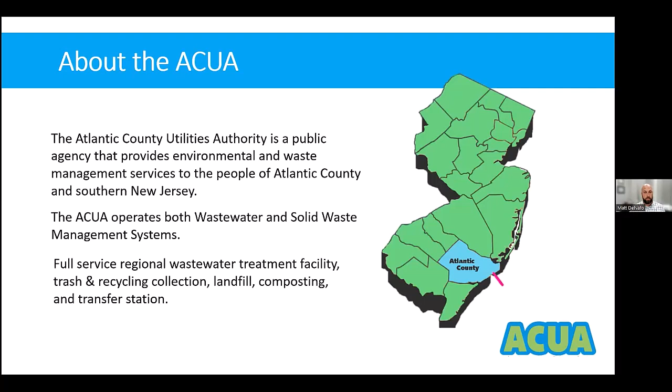A little about the ACUA: the Atlantic County Utilities Authority is a government entity in Atlantic County, New Jersey. We operate both wastewater and solid waste management systems, with a full regional collection system and full solid waste site that we'll go through in detail. Atlantic County has a population of 275,000, a little over 500 square miles in area.

In addition to servicing Atlantic County, we also have a satellite operation in Cumberland County at the Cumberland County Improvement Authority. I'll talk a little about some of the shared services we do, where we don't just service Atlantic County, but branch out into other counties and work through shared services that way.

Some of these shared services may be on a government to government level—most of them are—but sometimes they're just within the county. We have everything from a full certified lab, street sweeping services, storm drain cleaning—we're actually doing stormwater cleaning in Longport, a town within Atlantic County. We have a fueling station that private entities come to. The jitney, if you've ever been to Atlantic City and taken one, they're green, run by compressed natural gas, and they fuel up at our station. They also have their own station, but we try to really expand on shared services because that's the most efficient way to do things.

Having an individual organization, county, or town do every little thing can be difficult and costly, so shared services are a big thing that we promote. Whether it's a school district, a not-for-profit, commercial entities, or another sister agency in Atlantic County, we try to work reciprocally and be efficient in that manner.

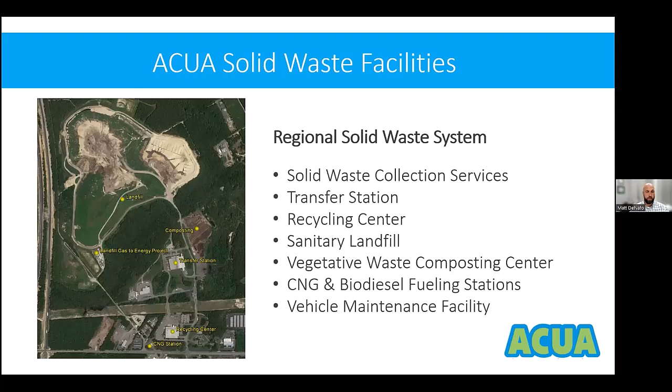The amount of waste - we service recycling, municipal solid waste (household garbage), construction and demolition waste, and vegetative waste here. So everything comes through our facility and is handled in different ways. A little over 300,000 tons a year in municipal and C&D waste, bulky waste, and a little over 100,000 tons a year in recycling material, and that's just for Atlantic County. There's a breakdown of what that material consists of.

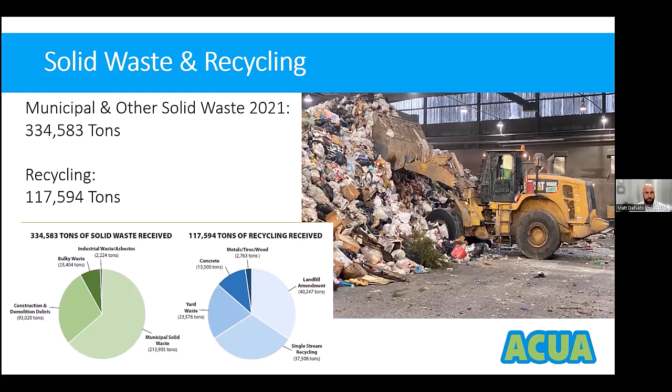Solid waste collections - one thing that's kind of unique for us as a county agency is that we do our own collection services. You won't find that a lot in other towns. You'll find townships that do it, but not a county agency. So we compete with the private sector in collections, whether it's trash, recyclables, or even vegetative waste, your leaves and grass clippings. We provide services to 24 municipalities, not just in Atlantic County, but also in Cumberland County.

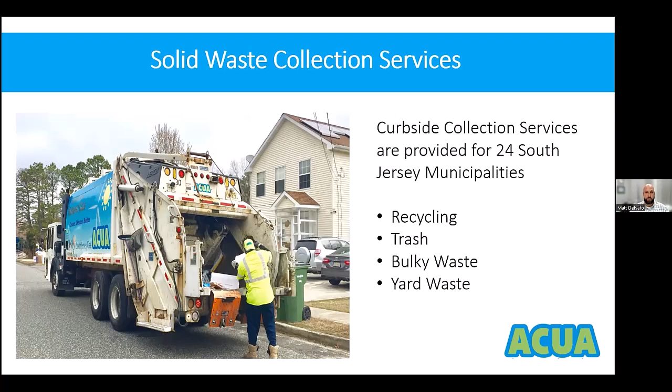This is typically a cost savings to townships. Maintaining trucks, keeping a fleet, and staffing is a big challenge, especially in this day and age, and the private sector isn't always the cheapest. So whether we are providing a second bid for the private sector to compete against, keeping people honest so it's not just one bid, or providing the service at a discounted rate that's cheaper than what they may get a bid for somewhere else - it always comes down to saving ratepayers or taxpayers money. Being a county agency doing collection services for towns is a little bit unique to us.

Recycling services - we have a recycling facility here, about 50,000 square feet. In the early 90s, our recycling center was state of the art. By the time I got here in the early 2000s, mid 2000s, that equipment had become completely obsolete. There was even a banner that said 'state of the art recycling center,' and this equipment had just become completely obsolete - it was only worth what it was in scrap.

So in about 2008, we brought in another company. They retrofitted the entire building with $8 million worth of new high-tech single stream recycling processing equipment. Within the 10 years that passed, that equipment started to become obsolete again. About a year or so ago, when recycling markets dropped out, our contract was up with that service provider, and we're operating our processing facility as more of a transfer station now, sending it to Tinton Falls, to a recycler called Mazza Recycling. They have a brand new facility with a lot of new technology - artificial intelligence and optical sorting that makes the process a lot more efficient.

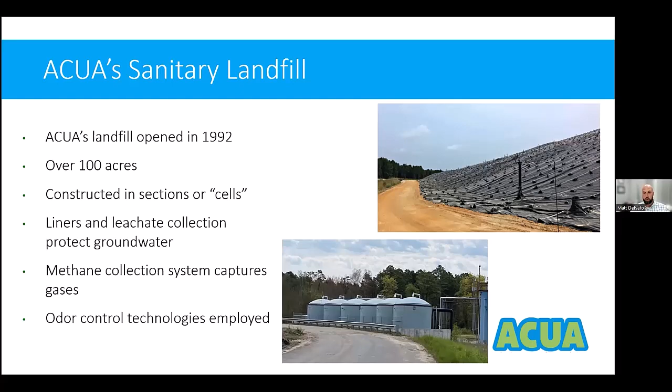One of the projects we work on to extend the life of the landfill - we build in small 10-acre cells at a time - is once we've expended all of that flat area, we look at what are called MSE walls, mechanically stabilized earthen walls. You see them a lot on turnpikes and expressways where you have an overpass, as a way to create a shear wall. If you imagine a landfill as a big mound with a slope coming down on the outside, and you build a wall on the exterior, you create this cheese-wedge of airspace you can capitalize on, which amounts to quite a bit of volume without taking up a lot of space.

We're really constrained by our wetlands boundaries on either side of our landfill, so going wider isn't an option for us on a 365-acre site. So we're building these earthen walls around the exterior, taking advantage of what I always call that cheese wedge, which extends several years of landfill space in our process.

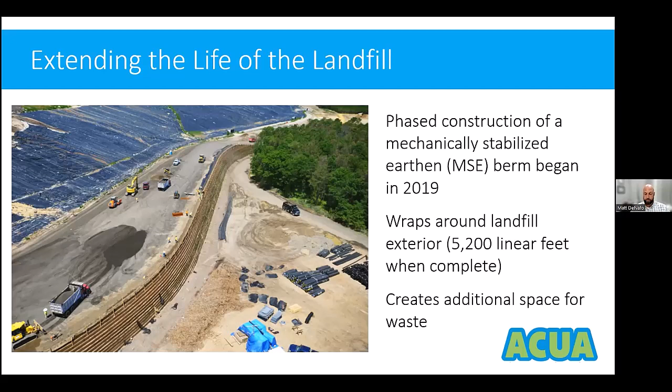The next facility is our composting facility, a 10-acre site. We have our leaves, grass clippings, and clean wood come here. At Christmas time, we have piles that turn a little glittery because everyone's getting rid of their Christmas trees, and they leave tinsel on, or something else on there.

But it's really a great process. It's diverting material from our landfill, and it's a 6-month process. All the material coming in is being sorted typically by grass and leaves. We try to keep the grass a little bit separated from the other material, like mixed branches and brush, because that's our nitrogen source. And then we have leaves, which are your carbon source. The staff there is kind of balancing that a little bit.

After about 6 months, we're able to screen that into a really fine compost material. That process again starts in about 2 or 3 weeks, and we'll start the batch that'll be ready for the spring. So there's already talk that if equipment is down, we're not going to have enough material for the spring, because we sell out by May.

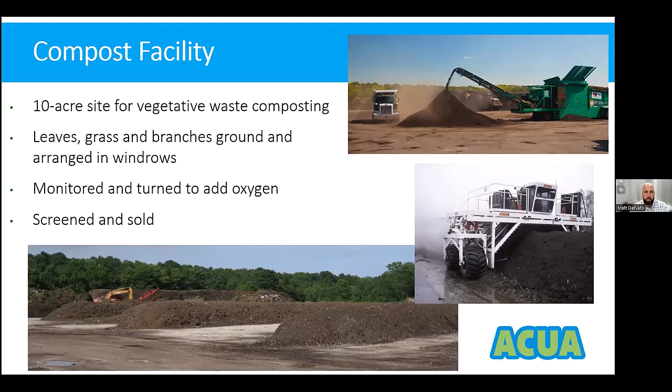But this material is sold in bulk, and we also package it in smaller bags, and we donate stuff to community gardens. It's a really great way to divert material from going into the landfill, reusing it. It's a really great, rich product that we have, so landscapers love it, homeowners love it. Again, it's just a great way to divert waste that's going into the landfill.

So that wraps up really our solid waste facility. The next facility - again, we do solid waste and we also do wastewater treatment. Our wastewater treatment plant is a little bit more famous, a little bit more in the eyes of the public. Our landfill, we don't want it sticking out in the public - nobody wants to see a landfill. So that's always hidden back behind our environmental part.

But when you get closer to Atlantic City, you start seeing the windmills, and that's where our wastewater treatment facility is. It's designed at 40 MGD. It's an activated sludge treatment facility, and I'll go through what that process means for activated sludge.

We also have a regional collection system, 60 plus miles throughout the county, and we process material for 14 municipalities. There are 23 municipalities in Atlantic County; we process or collect wastewater from 14 of those through our regional system. That's mainly due to the Pinelands - as you move further west from Atlantic City, you get into Pinelands towns, and that's not an area where they're promoting development, so they don't want the sewer extended into those areas.

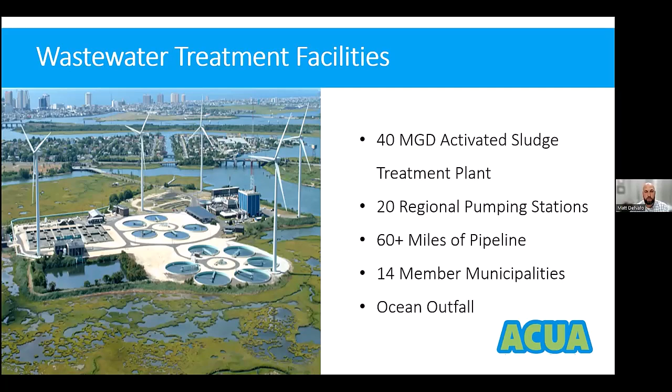So just a recap on why we were created, as far as managing the wastewater, is the Clean Water Act of 1972. You had a lot of individual treatment facilities that were only doing primary treatment. They were disposing into local rivers and bays, and they were really contaminating waterways.

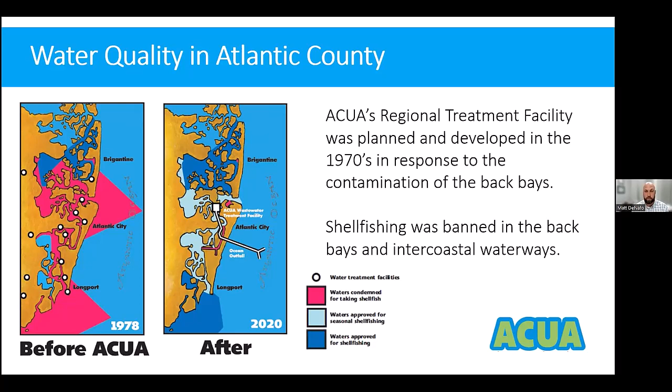Our plant went online in 1978. It was being built all through the early to mid 70s.

So again, our reach is 14 municipalities. We go as far west, if you're familiar with Atlantic County, Egg Harbor City, which is along the Whitehorse Pike or Route 30, and Mays Landing, which is out by 322 and the Black Horse Pike. That's really our limit because of the Pinelands and the planned development. Pinelands is not extending sewer into areas that they don't want to develop. So 14 municipalities, and it's here.

We have 20 pump stations that we operate regionally. In addition to our own pump stations, we talk about shared services. We service another 80 pump stations that aren't ours. So Egg Harbor Township is one, Linwood. So local towns that we have the resources for and the staffing and the expertise licensing, we offer a shared service through them, and we maintain and operate their facilities as well. So it's a little over 100 pump stations that we actually maintain and operate over the course of a year.

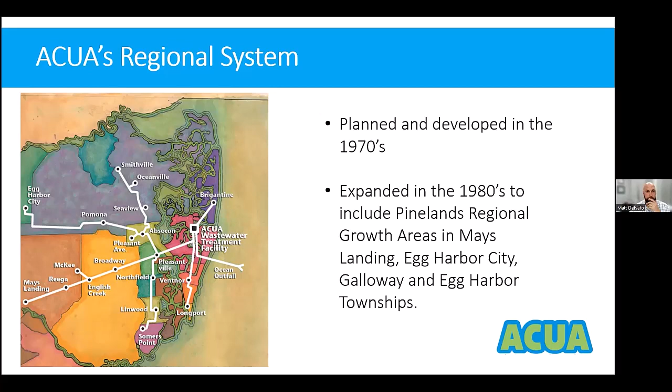The treatment process, like I said, we have 40 MGD. It's rated for 40 mg/d. Our average flow is about 28 to 29 million gallons a day. It's a 24-hour facility. Obviously, people don't stop taking showers or washing dishes or flushing the toilet. So the operation is a continuous process.

We do an ocean discharge, and our permit requires you to remove 85% of the total suspended solids. We're typically in the 95% range.

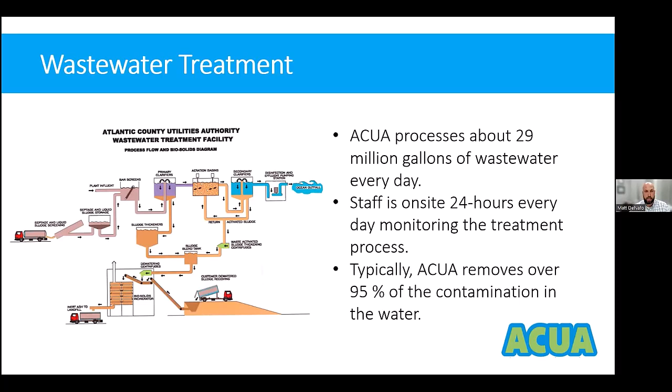There's a couple of pictures that show what the water comes in as when it starts and when it ends. And then there's a process diagram here, which is maybe a little hard to read, but if you see the slides or look through them afterwards, it really makes it a little bit clear what we're trying to do in that wastewater treatment process. We're continually trying to separate the wet end, or the water, from the solids. The solids could be rags, they could be biosolids, but we're constantly trying to separate those two, and that's really what the process involves. So I'll get into those details as we move along.

So again, we have a wet end treatment where we're removing solids, and we're disinfecting, and then we're discharging to the ocean, and then we have a solids end. So as we're removing the solids from the wet end, we're thickening that, we're dewatering it, and then we're actually sending it to a sludge incinerator that we have on site that reduces the volume by about 90%, and then that ash is disposed of in our landfill.

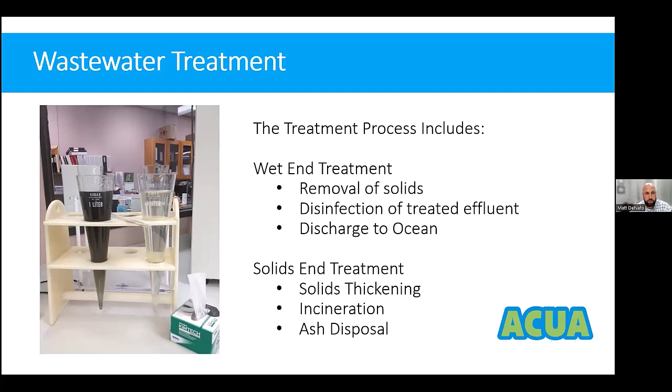The picture is a picture of the influent. So influent is the water that's raw that's coming in from the pipelines. You can see how dark and dirty that is, and then the picture on the right is what it looks like after it's discharged to the ocean and chlorinated. So it's a highly effective process. It's secondary treatment. So you're taking it a step further than it was done in the mid 50s and before 1978 really.

So the first part of the process, even before primary treatment, is our headworks facility. So it's a building that your materials coming in, and there's bar screens in there, and they sound exactly what they're named. They're bars that act as screens, and they're removing the heavy solids, the rags, the flushable wipes that are not really flushable. They're catching there, and everything else that kind of catches, like storm debris that comes in.

One thing to note about our facility is we are not a CSO, so we're not a combined sewer, which means our stormwater does not go into the same pipes as our wastewater. So the city of Camden is a combined sewer. So when it rains, the storm drain goes down to the same thing with the sanitary sewer, so you get this volume of water that comes in. However, you still get infiltration from local systems. So when we have flooding along the coast, you still have water that intrudes either through pipelines or through manhole lids. So our design is 40 mg/d, our average is 29, 28. We can get up to 60 mg/d when it rains, and that's really an influx of rainwater that's coming in.

But everything goes through that headworks facility first, and then after that, that's really where the treatment really starts. So it starts at our primary tanks. They're big, giant cylinder tanks, and you have your heavier sludge material that's dropping out of the bottom, and that's being sent over to another process that's thickening it. And then you have the overflow going over a weir, and that's where the solids are scraped off the top, anything that's floating, and then it goes to our next process, which is the biological process, the activated sludge treatment process that we have. And that's really kind of where the magic happens for our treatment facility.

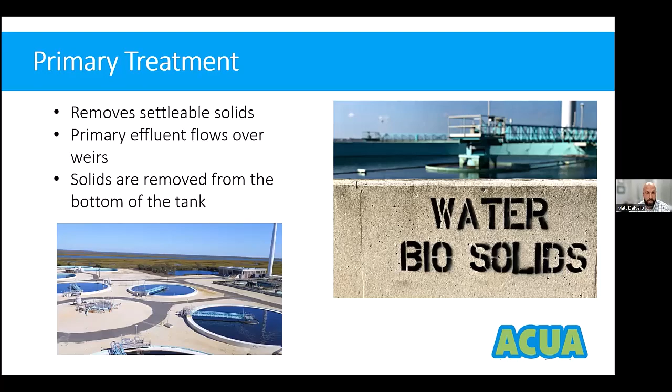The oxygen that is being aerated into the tanks is feeding those microorganisms, and that's the biological process. These microorganisms are ingesting the nutrients and solids that are not heavy enough to sink down in the primary process. As they ingest and start to combine, they get heavier, and then they get to the next process where they're able to settle out.

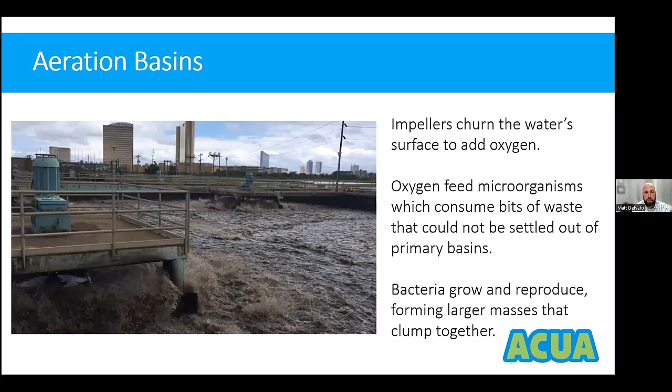This process is a little bit antiquated. What you're looking at here are some pretty big, giant motors and gearboxes that are just aerating on the surface. We're working on going into a diffused air system that'll be much more efficient. We're actually talking about a green hydrogen project with this, which I'll talk about more later in the slides. It's pretty exciting.

There are good bugs and there are bad bugs, and there's a high population and low population. The good bugs you want to keep feeding, but at the same time you don't want the population to explode where they start really eating themselves. So they're constantly trying to balance that, making sure they have a good population of biological activity in the wastewater sludge. And of course you don't want the biological process to have bad bugs in it, that's not going to create the same effect that you're getting with the culture in that aeration process. So our lab is constantly testing things to see where that process is at, and there's different things operations does to correct one way or the other.

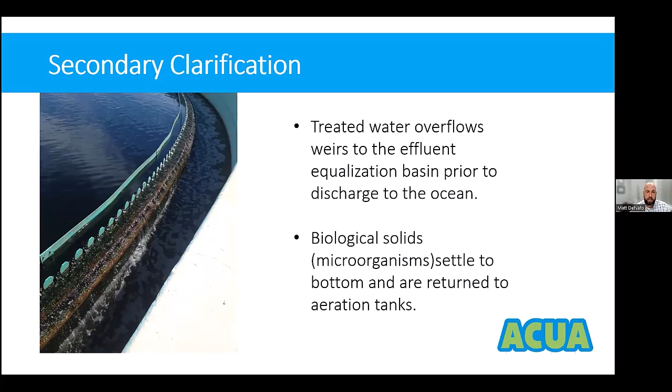The solids that come from the bottom of this tank are now considered activated because there is a biological process to that. So they're either put back into our aeration if we need more population of that bug, or they're sent to our centrifuges where they're sent to other tanks where they're actually thickened up and then blended, and that's where they go for incineration.

After our secondary clarifiers, that's really the end of the process. We have two things here. The first one is we're chlorinating it, taking out any last little bit of biological bacteria that's in it. But as far as total suspended solids, like I said, it goes out to the ocean. It is clear water, and is typically over 95% removal of our total suspended solids.

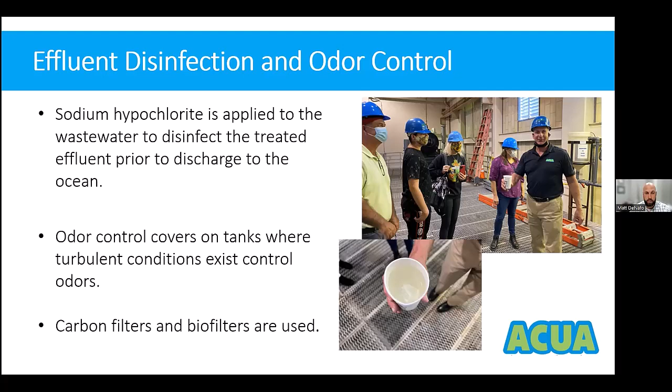Before it actually goes out to the ocean, it's stored in the equalization basin, where we're able to discharge a little bit more evenly, as opposed to the peaks and valleys of wastewater. In the morning we get heavy flow because everybody's up getting ready for work, flows are high, people are taking showers, and the same thing happens at the end of the day. Everybody's coming home, cooking, running the dishwasher, taking showers, running the sink to clean dishes. So to balance that out, we use an equalization basin.

It also helps us during that storm surge, when our flows can go up to upwards of 60 million gallons a day. It gives us a little bit of capacity at our facility. The discharge is sent out right on the border of Atlantic City and Ventnor, off of Raleigh Avenue. It's a 1.5 mile underground pipeline that discharges to the ocean.

This is the setup for most of the coast here, so all the wastewater moves from west to east. The downfall is we're pulling fresh water out of aquifers underground and discharging it to the ocean, so you never really get that water back in those aquifers. It's a big concern, especially in the pinelands, where you're depleting a lot of these aquifers.

Fortunately, New Jersey is water rich, but I do feel there'll be a time where we're not as fortunate, and we may be in a situation like California and Arizona, where they're trying to figure out how to reuse a lot more water.

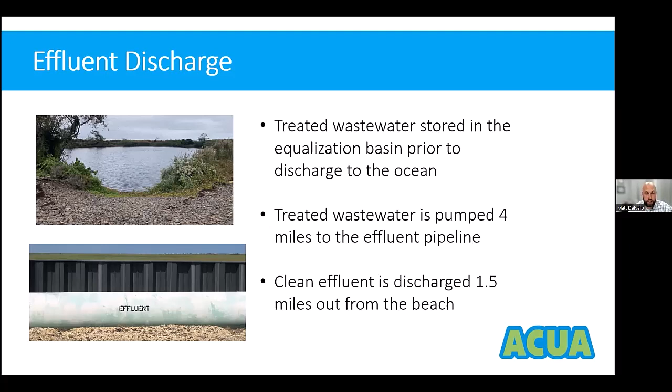So we talked about the wet end. Managing the biosolids is really the solids end of things. They settle out of the primary treatment, and we accept some sludge from outside entities. Cape May County MUA actually brings us all of their sludge, so we handle their biosolids as well. We're a regional disposal for biosolids, done through our incineration process.

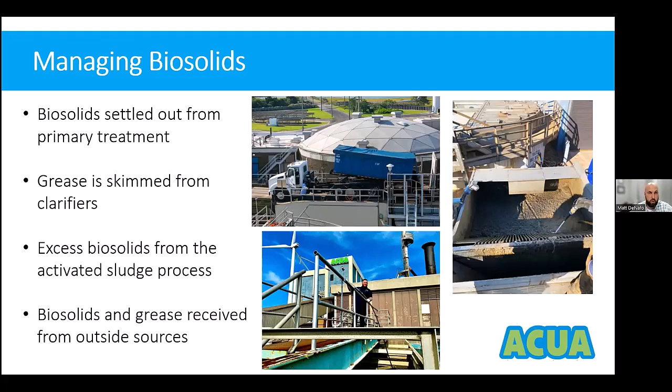Before it's sent to incineration, we add polymer, which thickens it up. The drier the material, the more efficient it is to incinerate, so we don't want a really wet material. That's why we're dewatering or thickening. We use high-speed centrifuges for that, and they seem to be the most effective way to get that material to a dry enough consistency that we don't waste a ton of energy combusting it.

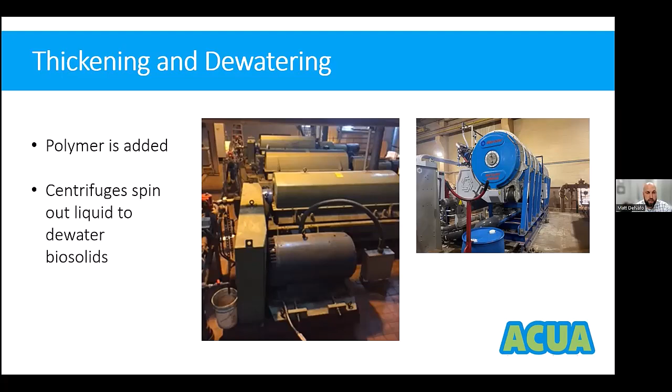We have a multiple hearth incinerator. We're one of five in New Jersey. It's got, I believe, eight hearths. It starts from the top and works its way down, and it's a 90% volume reduction.

Landfilling biosolids in New Jersey is illegal, so there's not really a lot of options you have. The other option is potentially composting or aerobic digestion, but we're on a 40-acre site surrounded by water on an island, so we don't really have the real estate to do something like composting, and composting comes with its own challenges with odors. We see even with vegetative waste, the odors when breaking that material down can be a significant nuisance for neighbors too. So incineration is what we've been doing since the late 70s, and we're a regional depot for a lot of the treatment facilities in the area, because it's the most efficient way to destroy the biosolids at this point.

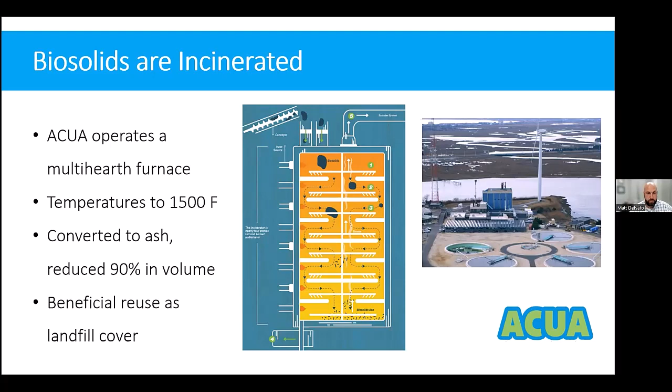So now the more interesting part, I think the group here is interested in hearing about, is really our renewable energy and sustainability initiatives that we've had throughout the years here at the ACUA, and also what we're looking forward to in the future.

The most iconic, and the one that's very easy to say, 'hey, where the windmills are in Atlantic City, that's where I work' - that's my line when somebody asks where the ACUA is. Just off the coast of Atlantic City, we have 5 wind turbines that were installed in 2005. So a little over 15 years - we're about 18 years into these windmills being constructed and operating.

We don't actually own the windmills, so we lease. We did a private partnership - we leased the land to them and we purchased the electricity from them. There are 5, 1.5 megawatt GE turbines, totaling 7.5 megawatts. The cost to construct was $12.5 million, and it was not a single dollar that we spent to construct these.

We're able to benefit now because, one, our electricity is being provided through wind, but two, it's at a cheaper rate too, so there's significant savings. We get 60% of our power from the windmills, and our power consumption is about 2 to 2.5 megawatts. So when all 5 windmills are running, they're discharging to the rest of the grid.

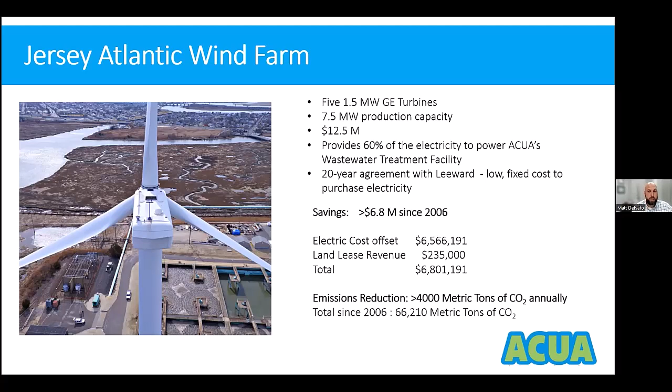We're getting costed a fixed rate of about 9 cents a kilowatt, as opposed to 13 or 14 cents from the utility right now. When all 5 windmills are running, the company, Leeward Energy, is discharging and selling to the grid, but at a reduced rate, probably closer to 5 cents a kilowatt, compared to 9 cents when selling to us. So it benefits them to sell more to us.

In addition to our wind initiative at the ACUA wastewater plant, we also have a 500 kilowatt solar project consisting of ground arrays, a couple of roof mounts, and a giant solar canopy over the employee parking area. It's 2,700 panels, and it's a small percentage, but it's something—about 4% of our electricity, depending on the sun being out.

At this point, this electricity is free. This project was paid off several years ago through SREC incentives and different federal grants that we got. But it's been a huge savings for us, and it just gets passed down to our ratepayers, and it's a great thing to do because we're using renewable energy to power our treatment facility.

So these are really the two big projects at our treatment facility that have paid dividends, and both went in around the same time, around 2005. So they're getting to that 20-year period.

For the windmills, we're looking to renegotiate a contract with the existing operator, and what we're pushing for is to install battery technology, which will allow us more redundancy on backup power, and to discharge when the wind isn't working, storing and saving more money, since when the windmills aren't spinning we're purchasing electricity off the grid. It'll also help the owners of the windmills, since they're able to sell it to us at a higher rate than they can sell to the grid.

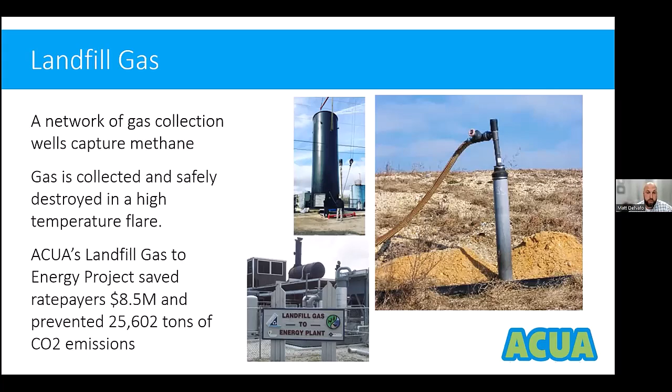On landfill gas, last September we actually shut these generators down, and we're working towards a new project to take this landfill gas and turn it into renewable natural gas. I'll talk about that in a future slide, but I wanted to note here that we're changing gears with this project. It worked out really well for us from 2006 to about 2021, and now we're looking for what's the next thing we're going to move towards.

Alternative fuels: we've been a big proponent of biodiesel, plug-in electric vehicles, and for heavy duty collection trucks, CNG. Battery technology is coming along, but for heavy duty Class 8 trucks, it's really difficult to find a 600 kilowatt charger to charge a trash truck. We have a fleet of about 80 heavy duty trucks, and in 2012 we started converting them over to compressed natural gas. The cost savings here are significant, and there's a reduction in emissions.

There are diesel particulate filters on diesel trucks that we were running, which were cutting down on those emissions. So we ended up jumping ship and going to CNG, which has about a third of the emissions compared to what a diesel truck has.

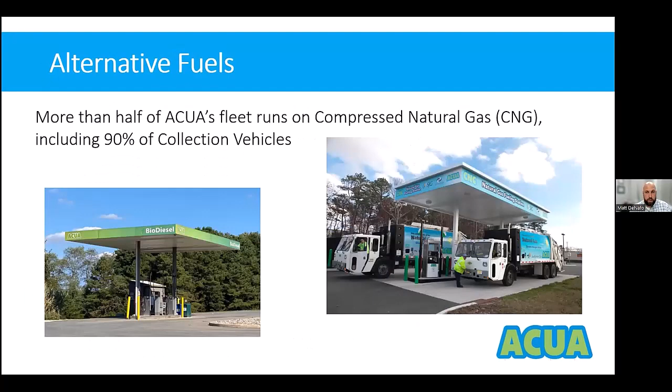We have our Packer trucks, and we also have a sweeper, and we even converted some of our smaller trucks, F-150s and F-250s, upfitted with CNG. There's a huge benefit to the environment and also a huge benefit to ratepayers and savings. It makes sense, it's a double positive here because we're seeing significant savings.

We really saw that when fuel goes up. This year, diesel was at $6 a gallon, while we were paying just under $1.38 a gallon for CNG. It's been $1.38 for 3 years straight, so it doesn't fluctuate. We're able to purchase it as a commodity and lock into a contract, so there's no fluctuation in what diesel prices are going to do that year.

We still have heavy equipment that operates off of diesel, which can be a nightmare. But if we had the rest of our fleet, 80 Class 8 trucks, also running on diesel, it would be a much bigger and more significant challenge.

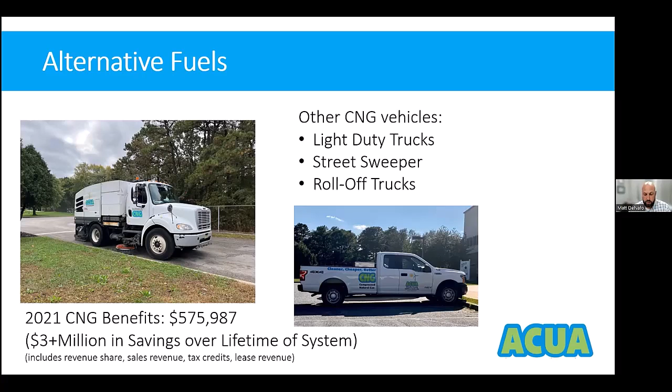Electric vehicles, again we've always been looking for when those come out. So we have a fully electric EV Leaf, plug-in hybrid Priuses, and we run these gem cars, which are like glorified golf carts for on-site stuff, and then charging stations. We've had charging stations at our site for probably close to 10 years.

Not just our sites, but also throughout the county, we've been able to install some as well, developing that network. They're open to the public, so the public can come and charge, whether it be at our solid waste site by the airport or at our treatment facility by Atlantic City.

Some of the exciting stuff we're looking at now is like the last part of this project. That's been the last 15 years, how we've developed some of these new emerging technologies and how they've not only benefited the environment but proven to be great technologies that work and save. We're now looking for what's the next generation look like, what's the next step, how do we continue to evolve and be innovative.

So the first project I mentioned a little bit was our landfill gas project. The economics on gas to energy has been a challenge, electricity costs have gone down a little bit. The other challenge is landfill gas can be very difficult to run through an engine without having trouble operating that engine, so cleaning it up can be a challenge.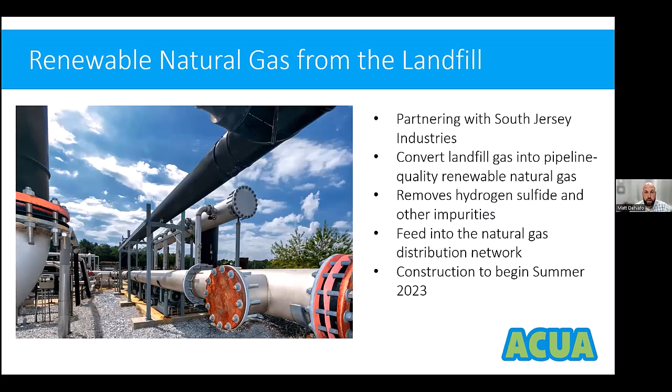This is something we've been working on for about three or four years now. We just signed our contract last year, and they brought on a contractor and design team within the past few weeks. Hopefully by the end of 2023, early 2024, we'll be in operation for our RNG site at our landfill.

The community solar project: solar has always been something we've wanted to utilize at our landfill. We have about 20 acres that have been permanently capped and closed, and we've been constantly trying to figure out ways to put solar on this and benefit from that wasted space that's now going to be there for 100 years. How do we make beneficial use out of that?

We were able to apply for a community solar project through the BPU. We were actually the highest awarded project as far as ranking, because we were not only on a brownfield, providing a use for the landfill, but we were also providing electricity to Pleasantville Housing Authority, which is low to moderate income. So the project is going to benefit 100% low to moderate income households.

We weren't really benefiting financially from this; it was more of a social benefit to the community. But it made sense for us to do this since we had the space, so we're in development with that. It's been a bit of a process with interconnection challenges—the grid is strained, and obviously this was all happening during COVID too, so trying to get people to meet and get decisions made was a challenge.

We've finally gotten the interconnection issues squared away, and now we're just working through a couple things with the BPU and some of the incentives for the developer. This will again be another third-party developer—they'll come in, invest several million dollars in developing this, and then offload that electricity, which will be beneficial to Pleasantville Housing Authority. They'll get a discount on their electricity, and it'll be a much greener supply of electricity.

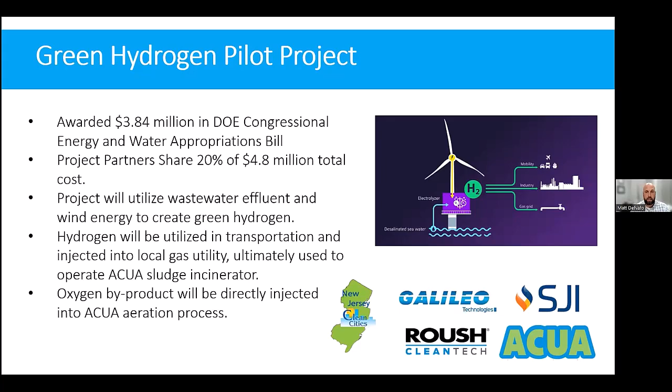So this project is under design right now. We're going out to bid for RFPs for the design of our aeration process. And Clean Cities Coalition is acting as the lead to coordinate everybody else.

For EV fleet conversion, we were awarded through the RGGI grant program an actual collection truck. They're starting to come to production. We were awarded a little over $400,000 for the demonstration of this truck. There's more and more that are coming out.

It'll have to be used in an LMI, low to moderate income, or socially disadvantaged town, which we have a few within close proximity that we do collections in. We're hoping to get that truck here in late 2023, but my guess is probably early 2024.

It also comes with a charging system, so we'll install a 2-port 600 kilowatt charging infrastructure at our site. So we'll really be able to test this equipment out and give feedback on the evolution of how that progresses as we move forward.

We're also looking to convert a lot of our CNG F-150 pickups to Ford Lightnings. It just makes more sense economically and service-wise. The technology's there now, so we get the range on them.

And we're also working on direct fast charging stations, DC current charging stations that'll be open to the public. One of the sites is right outside Atlantic City at our treatment facility, which is a tourist area, high traffic volume, but these DC fast chargers are not very prevalent.

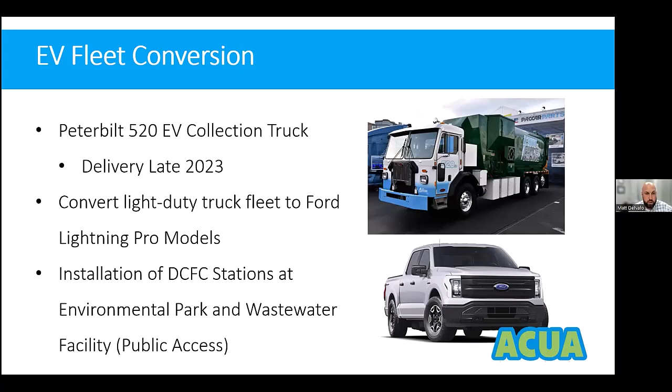So they're trying to push them out. We're going to be installing at least one, maybe two of those in that area that'll be open to the public. And then our biggest project that I've been working on is a waste conversion technology.

Landfilling is great, it's cheap, but it's not the most sustainable way to do it. But unfortunately land masses were available and that's what we're using. For the past 15 years, we've been researching alternate ways to dispose of our waste to have less of an impact on the environment and the footprint of our landfill.

So we're getting ready to release an RFP that would award a contract to someone for some kind of waste conversion technology. When I mean waste conversion, I don't mean incineration. I mean digestion, mechanical sorting, pyrolysis, even maybe a plasma process, which is much different.

The mechanical sorting seems to be the front runner in the way to handle this. What that is, it's almost running your trash through a recycling process. So you're sorting it, pulling out all the recyclables, getting almost 100% recyclable material out of your trash.

You're able to break down fiber material and either create a pulp to send to a paper mill, or recycle that into recycled paper in another avenue. You're taking organics now and throwing them in an anaerobic digester, creating more RNG, but reducing your total waste by 80 to 90%, depending on what your off-takers are.

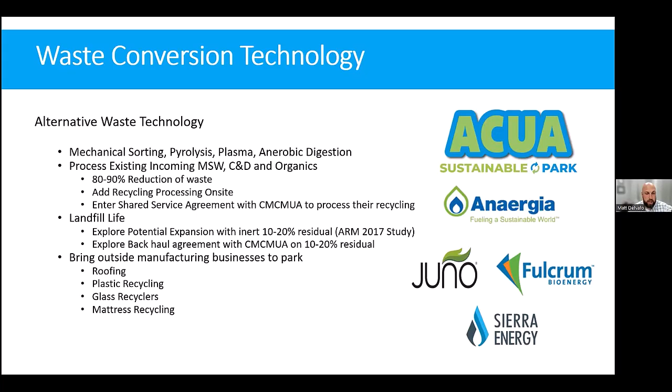It's great, it's the most efficient way to do that. But when you're looking at environmental impact, there's better technologies out there that the U.S. really, in my opinion, needs to get on board with. Europe is way ahead of us in that respect.

So the last couple of things is community outreach. I think Chuck had come to our facility. We do a ton of tours. So if anybody is in the area, especially in the summertime, we do open house tours. Feel free to shoot somebody a line. My contact information can be shared, and we can set you up with a tour at any time.

We have a drive electric celebration. So again, if you're in the area, we have an electric vehicle car show tomorrow, here at our environmental park, where there'll be demos of different EVs, smaller vehicles and large trucks, bikes and motorcycles.

Some of them you can actually test drive. We do that every year, and it just so happens that it's tomorrow. Actually, it started today - there's a virtual one, and tomorrow's the actual on-site car show. And that's my presentation, so I'll open up to questions.

I hope I didn't go too fast, and I hope you guys found the information beneficial. Isn't there a huge sustainability fair that occurs in the spring? Yes, our Earth Day, our famous Earth Day - that's one of the hats I wear, organizing our Earth Day festival. We get upward of 10,000 people here at our environmental park, all sorts of vendors. It's the Sunday after Earth Day - if Earth Day falls on a Monday or Tuesday, it's that Sunday following the official Earth Day. It's a great event, everything from sustainable vendors to tours of the landfill, the recycling center, and the wastewater treatment facility. It's become a really good event for families and people interested in environmental issues and sustainability. Look for that in April. Thank you so much.